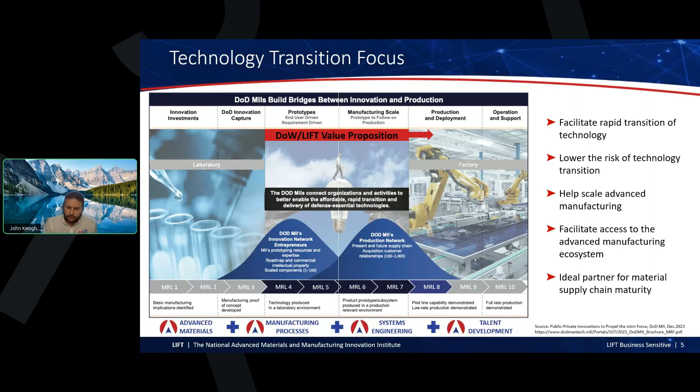Now, the reason we're here, talking and spending our time together, is, as I mentioned, a technically interesting but also serious problem, serious topic: hypersonics. So I want to frame up what it means, why do we care, why is it a problem.

But there's a pacing threat too. Adversarial nations, China, Russia - we'll talk more about that in a couple slides - have operational and/or near-operational systems. So the United States really has to hit the gas pedal, put the pedal to the metal, or balls to the walls, airplane lingo, to not only maintain deterrence, but really regain an overmatched dominance position in layered defeat options.

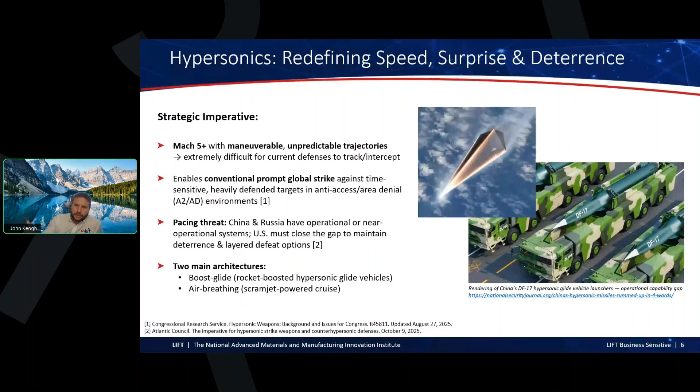But hypersonics, why is it different, right? We all know the stories about the SR-71. If it's sitting on the tarmac cold, it's leaking jet fuel. It has to get up to temp to actually cause that thermal expansion of the body and start sealing up those joints so it no longer leaks. They actually have to refuel in the air, and then they're fine to go.

So aerothermal heating, something that we're all familiar with, right? Well, aerothermal heating and just the conditions in general begin to change dramatically once you hit Mach 5 and above.

In those conditions, the air dissociates and ionizes. So it's a plasma, right? So now you have non-equilibrium chemistry. It's a very aggressive chemical environment.

That plasma sheath does a lot of interesting stuff as well. Of course, it drives oxidation and erosion. It also transfers heat to your surface when the plasma recombines to the surface. But since it's a plasma, electromagnetic radiation can't get through it effectively. So it also disrupts communications and sensors and things like that.

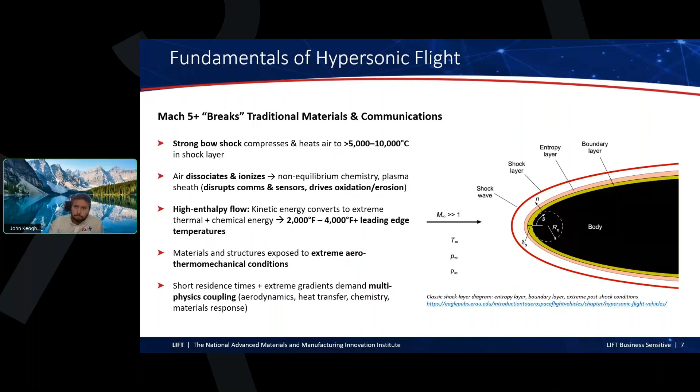So as I mentioned, it's exciting. It's fun to work on, but it's challenging, that's for sure. And that obviously then begets some serious changes as far as how we approach material selection and manufacturing, right?

So really, the hypersonics necessitates a materials revolution. We have ultra high temperature capability requirements, high specific strength and toughness, oxidation and erosion resistance, shock tolerance, thermal shock tolerance. As I mentioned, weight matters, right? Mass costs energy, and so you can't just launch a tungsten vehicle effectively. I mean, it can be done, but it costs a lot of energy. And then just as important, or maybe even more important, is manufacturability at scale.

So a lot of the material systems that are used are difficult to produce or take long times to produce. Later in this deck we'll see some interesting stuff we're doing, and I know lots of people are doing really fun stuff, but we're trying to help reduce costs and accelerate the production of a particular CMC that we'll talk about.

So there are some leading candidates, right? What we like to say UHTCs, ultra high temperature ceramics. There's also UHT CMCs, ceramic matrix composites. Of course your standard CMCs, like silicon carbide, carbon SiC. Carbon's another one with the appropriate TPS, some refractory alloys. I mentioned TPS, that's where the advanced coating comes into play to manage the oxidation and erosion resistance.

But there's a lot of maturation hurdles, right? I mentioned the predictive modeling of the material response and environment interactions, multi-scale, multi-physics, scalability, affordability, repeatability. Joining is also a big problem. That's again, interesting but difficult.

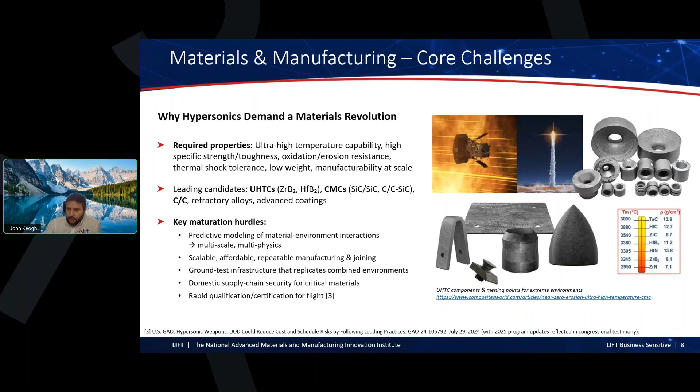So all these hurdles are real. A lot of great work has been done and is continuing to be done, but we need to hit the gas. And it's because there really is an existential threat, right? So there is an acceleration imperative for the United States to move faster.

But we have to be aware of this. They're pushing hard, they're hitting the gas. And a side vignette, just talking about shipbuilding, for instance the China State Shipbuilding Corporation, just to frame up adversarial nations - it's really not just a commercial shipbuilding industry, it's dual use, and they're putting, I think it's somewhere on the order of 1,000 times more mass into the ocean per year than we are.

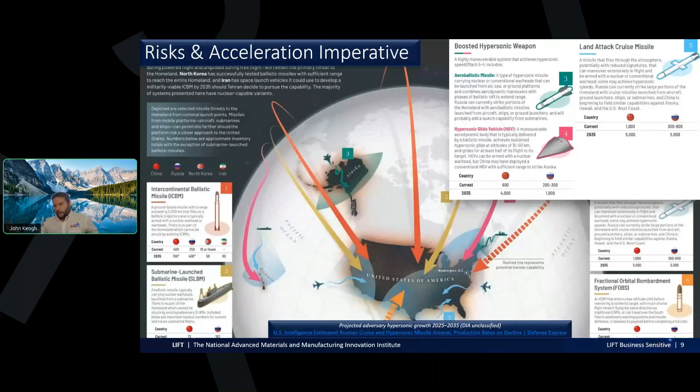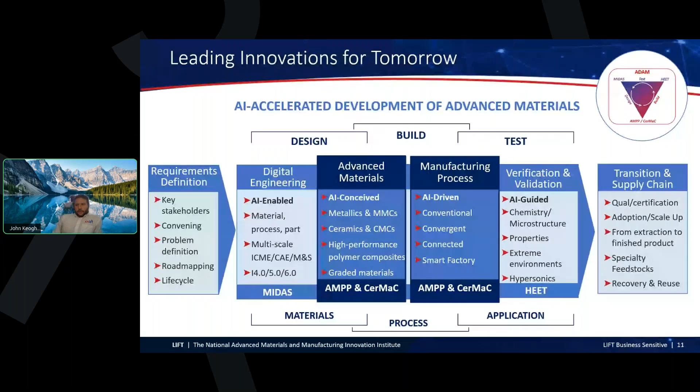So I mentioned those acronyms and differentiating capabilities. Really, that's what they are. At each one of those nodes and those verticals on the tech pillars is a packaged set of capabilities with a defined intent. I have slides in more detail on these, so I'm not going to dwell on them here.

MIDAS means the Materials Informed Digital Acceleration Suite. AMP means the Advanced Metallics Production and Processing Facility. CERMAC you can think of as the analog, the ceramics and CMC's analog of AMP. Then HEET is the Hypersonics and Extreme Environment Testing Facility. So MIDAS is design, AMP and CERMAC are build, and then HEET is test.

So MIDAS, just a couple slides. Anchor point, this is where we are, right? Digital engineering side of things, although again, it interacts and connects with the whole rest of the chain there.

Most of the time when people talk about integrated computational materials engineering... as we go through these, don't think about lift. Think about problem solving in the setting of hypersonics and extreme environments. How are we designing new materials fit for purpose, or solving problems fit for purpose, whether it's materials or manufacturing, they go hand in hand. When we see these slides, think about the intent of them: to facilitate finding solutions for those types of problems.

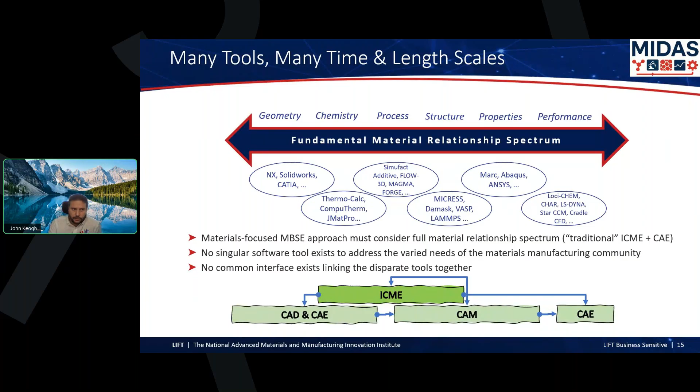So of course, if you can accelerate things like that with ICME and the whole design side of things, projections show that if we have a fully automated ICME approach across that whole spectrum, you can actually drop an alloy development schedule anywhere from 60 to 70% of the original time required, and 50 to 60% of the cost. So there's value there too, and this helps us move fast.

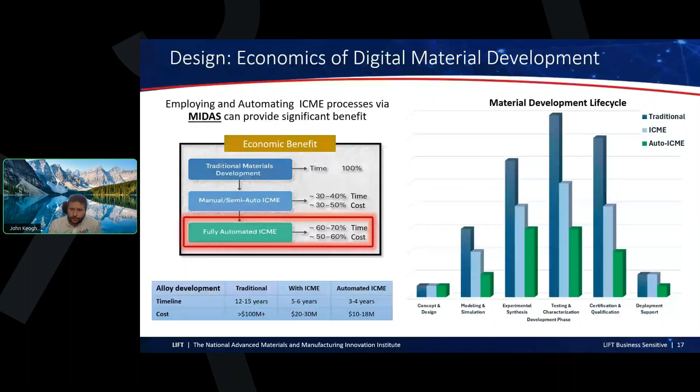Quick comment as far as connected shop floor and mission control. In that whole building, we have a bunch of equipment. They have sensors and process data and all that. We're connecting all those systems and their associated data streams into our mission control through our servers and HPCs.

We have dashboards that we display. We can look at real-time data. We can also interrogate those data streams with our ICME models as well, and really make that robust cyber physical connection. There's a lot to say there, but there's not time for it.

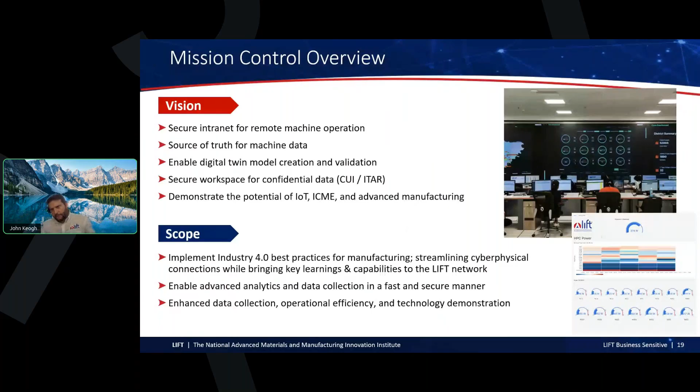So AMP, again, in the setting of problem solving for challenging environments, we're talking about build now. We talked about the design, now we're talking about build, materials and manufacturing process.

And what we found is that I can buy a crucible of novel powder or novel material from academia. I can buy a truckload from industry, but getting that development middle scale volume is very difficult in the United States. And so we recognized that, validated that reality, that challenge is real, and it's perfectly within our charter as an institute to stand something like this up.

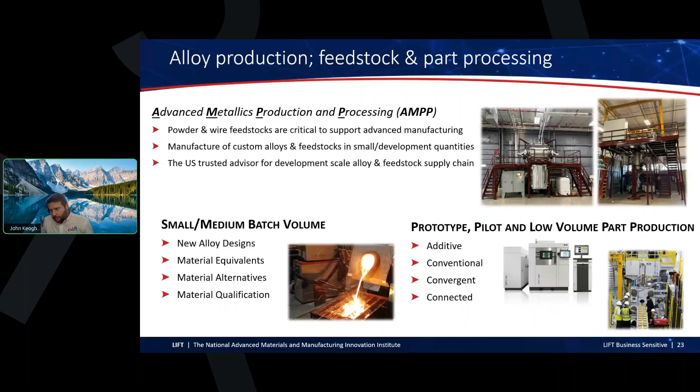So that's what we did, is actually stood up the advanced metallics production and processing facility so that we can produce development volumes of custom alloy feedstocks, say powder, wire, rod, bar stock, castings, et cetera.

And the idea is that, roughly speaking with some asterisks there, we can alloy just about any metal in the periodic table. We can make powder with just about any metal, any non-pyrophoric wire, and so forth. So it's to help fill that gap again, that 4 through 7 space. That's our charter, that's where we belong, and we're manifesting that in the physical build side of things.

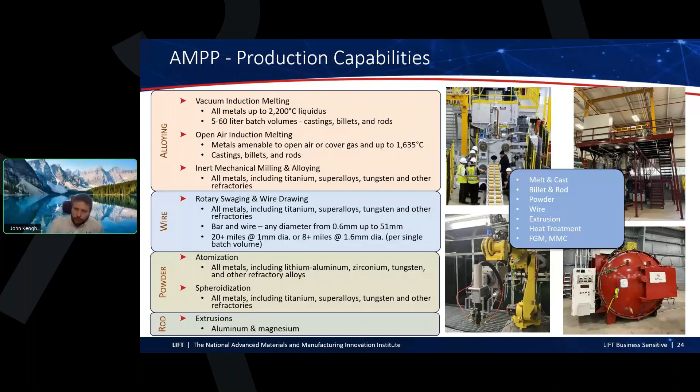So also have a lot of actual part production capabilities here. Powder bed fusion additive systems, a 1 kilowatt M290 as well, just to call that one out. I would say a world-class multi-wire plasma arc welding DED cell for large format builds, a whole bunch of other stuff, extrusion presses, friction welding, other presses. It's a big kid's playground for sure.

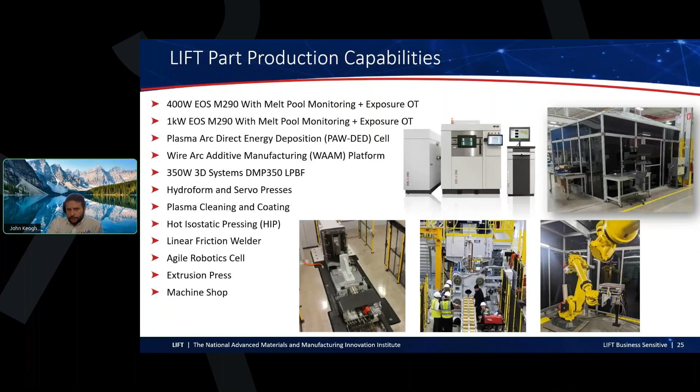So if you haven't been to Lift yet, please visit us, come see what we have and how we can help you. And then just a couple distinct call outs here: a 250-ton DCS press for direct current sintering, and then the plasma arc welding DED cell.

So we can do high build rate type stuff, 40 to 60 pounds an hour. We can run anywhere from 2, 4, or 8 wires into the melt pool simultaneously. So we can either do online alloying or spatially or functionally graded materials.

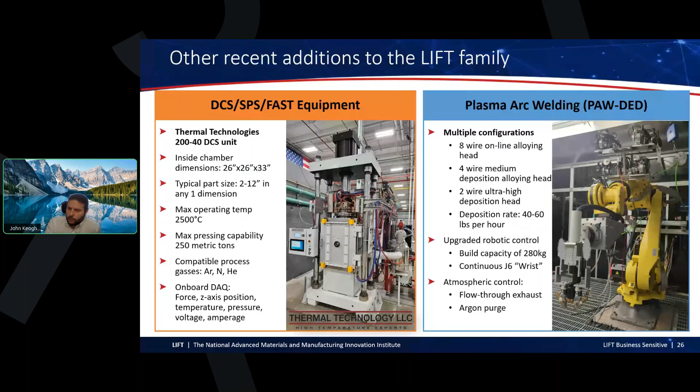So again, the functionally graded type capability actually maps into things like leading edges or kind of graded structures that are more appropriate for challenging environments. And then, as I mentioned earlier, comprehensive laboratory services, all the standard things that you would expect. Ceramics and CMCs.

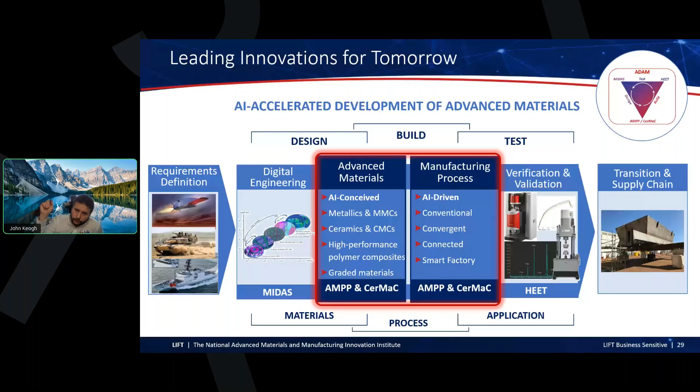So again, this is a build side of things. CerMaC is the high temp materials analog of AMPP, and our inaugural project that kind of nucleates CERMAC, we're looking at some process and material selection modifications to lower the cost and accelerate the rate for production of graphitic carbon-carbon. Looking at low viscosity resins that are graphitizable, they're actually thermosets, so we have rigid green parts we can take out, go straight to pyrolysis, and so on.

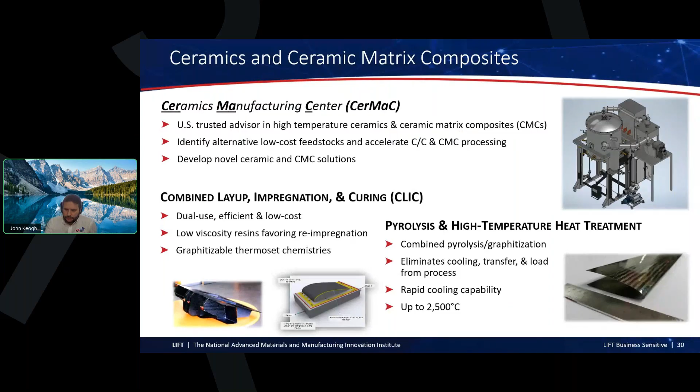And we have some process mods that we're looking at on the heat treat side of things as well to accelerate. So early stages of that project, keep your ear to the ground as we move that forward, but very excited about that. And then HEET, the testing side of things, V&V.

So currently we're standing this up at LIFT in Corktown. Eventually this set of capabilities will end up going to Selfridge Air National Guard Base in Michigan. Broadly speaking, we're talking about high enthalpy sustained hypersonic testing up to Mach 8, so Mach 4 through Mach 8, matching minimum runtime and enthalpies to the actual Mach number. We can simulate different altitudes.

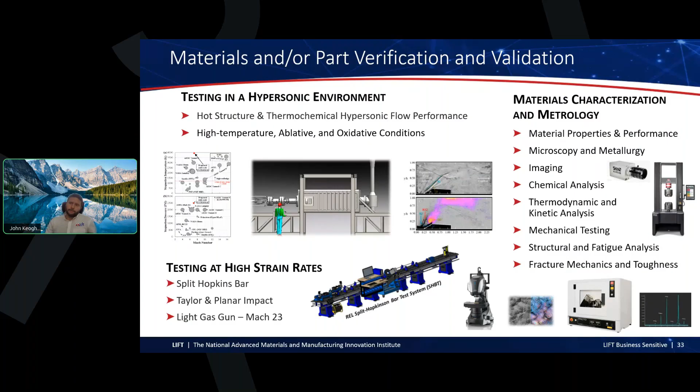So, high enthalpy sustained, high pressure, high temperature, up to Mach 8 testing with a wealth of in situ data that we can collect as far as thermographic, chemistry, pressures, you name it. And then the other side of things is more relevant to munitions and armor, basically high strain rate type testing up to 10 to the 8th in modified environments. So that's the HEET side of things, and I've got 15 minutes left, so I think this actually worked out really well here. So why do we care about all that?

Let's launch a poll right now as you transition, as you kind of just talked about that HEET. I'm going to launch this poll so we can understand what the audience is experiencing. It's launched. I want to make sure the audience sees it. When it comes to Hypersonic Systems, which best describes your organization's current role? It looks like I got some 25% participation for all those that are listening. If you could give it a minute. And then I do have another one as you transition to some of the other presentation, but we'll let this interrupt me whenever you want. No worries, just tell me when to stop.

So we've framed up LIFT, why we exist, framed up the problem as far as hypersonics, why we care, what are the unique challenges, our approach to problem solving, the associated set of capabilities in the setting of a National Manufacturing Innovation Institute that we've built and stood up to address these types of issues.

And so what? Well, I'm just going to give you a quick example here, how we've exercised that full workflow. We're not going to cover all of it, but that full workflow where we've run the digital thread across the whole spectrum, all the way from short length and time scales at the materials level, all the way through the performance level, and ran that hand in hand with the physical activities, making materials, making parts with materials, testing materials, and validating and calibrating those models all the way through to bring us to success for specific need.

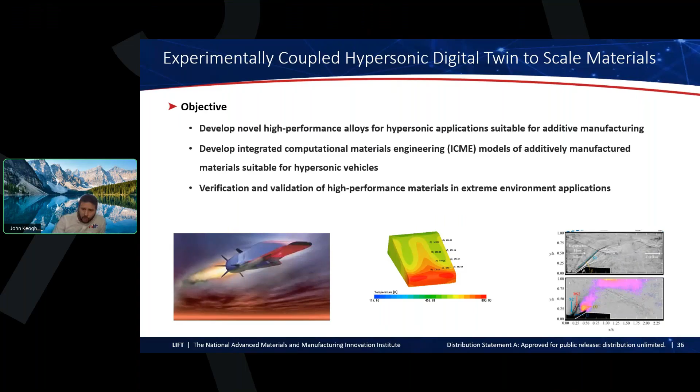There's actually multiple success stories in this, but either way, what we're going to do is focus on a couple elements of the scope of this project: the microstructure simulation, 3D printing—in this case powder bed—and also the hypersonic performance simulation. We'll eliminate the geometry, structure, properties, etc., but of course all of that was a part of it.

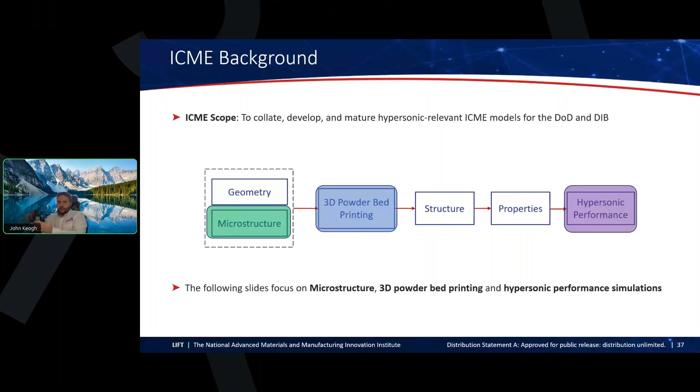So thinking about the microstructure, I mentioned chemistry, process, structure, properties, performance. Your chemistry moves through your manufacturing process, and that's going to impart those together, yielding a location-specific thermomechanical history. Things like solidification rates, along with the chemistry, will yield your microstructure, which then drives properties and all the other fun stuff.

So how do you predict your microstructure? Well, one of the ways we approach that is through phase field modeling. There's all kinds of interesting things about it—good things, challenging things, etc.—but this is what we leveraged and used: phase field modeling.

We then took that thermal history and coupled it with our phase diagram CALPHAD models and the phase field code, and we were able to simulate our microstructure evolution through the powder bed, heat treatment, and all that—identifying the presence or lack of deleterious phases, observing and predicting grain growth, and so on. We actually got very good agreement, pretty much across the board, so we were quite pleased with that.

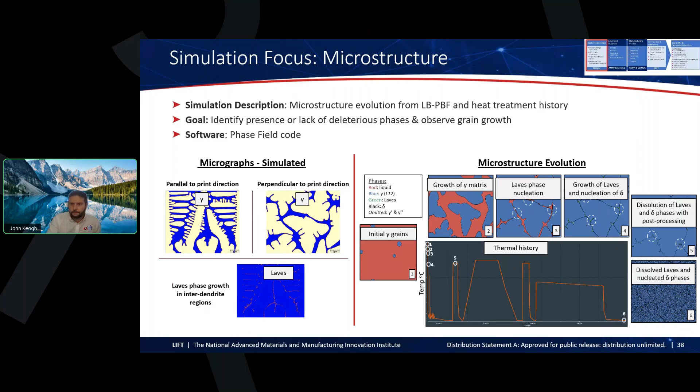Looking at the macro scale level simulations, what we're really talking about is the powder bed fusion and also the test. On the left, we're simulating the powder bed fusion and heat treatment—effectively a thermal FEA type simulation coupled in with our phase field and CALPHAD codes. The goal there was really to extract location-specific thermal histories and residual stresses.

One thing I didn't mention earlier about Midas is that it doesn't just pass models back and forth—there's a web and thread of connectivity across all those models tied to the geometry. So we can define a matrix of locations on a part and track them from code to code to code. We have this point tracking capability that we can carry all the way through, so we can actually audit on a location-specific basis, and again, we did that.

We can predict residual stress and temperature and align that against our physical results. Then in the hypersonic test, we're talking about a Mach 5 reacting flow test, similar to what we're setting up at Lift. We used two different codes to predict the aerothermal environment around these wall-mounted samples, and you can see the results are quite different—the one on the left has very high temperatures on the scale, while the one on the right is a little more realistic.

The one on the left is actually a hypersonic code—we're redacting it because we've actually worked with them to solve some of the issues there. But not all codes are created equal. All models are wrong, some are useful, so you have to be careful about that.

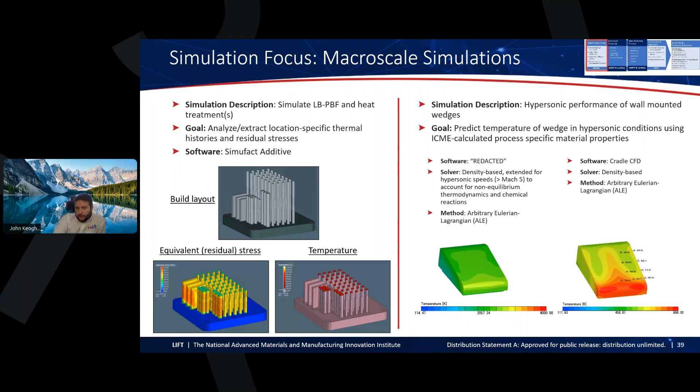So then COTS and novel alloy powder, as I mentioned, we worked with a couple different alloy systems. We benchmarked against the COTS, and also modified the chemistries to be more printable and mitigate some of the needs for heat treatment. We did that in Midas. At the time, AMPP was not commissioned, so we actually had that toll processed, and that was quite a challenge. And then, of course, you validate the chemistry against the spec and measure all the particle sizes, et cetera.

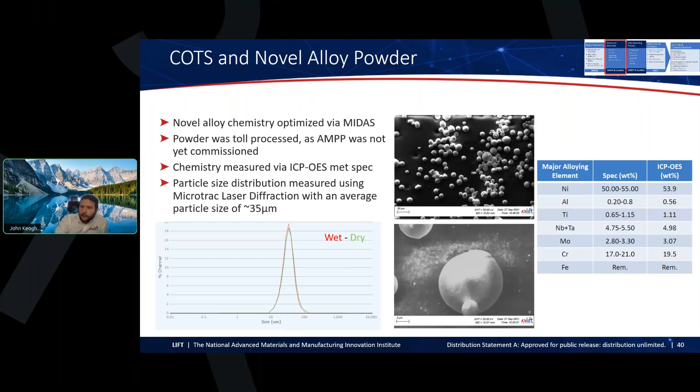So then we had powders. We made parts, as you saw on the prior slide, and what you see here on the next slide. We ran it through the manufacturing process. In this case, we actually just used your standard ubiquitous 400-watt M290 and made a range of fracture toughness or Charpy samples, tensile bars, fatigue as well. We looked at uniaxial, rotary bend, and we did a bunch of fatigue testing as well.

Now it's going to be in a different environment, and there's going to be different heating curves and so on. So we ran that all the way through, followed all the ASTM methods. Stress relief, wire EDM to remove specimens. We also HIP, solution annealed and aged, and then brought this into the physical test.

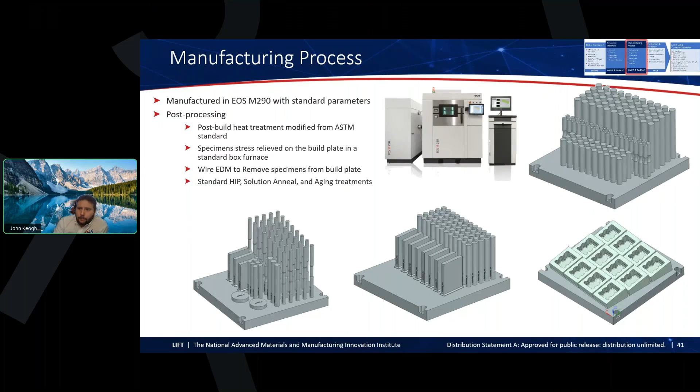And then we carried these results from CFD1 back to the software vendor and actually brought them value and identified some challenges and issues. I think that we've been able to course correct with them since then. So part of the way that we work with our partners and help to bring value. But again, this all relates to the handshake between the digital and physical and building that digital thread all the way through.

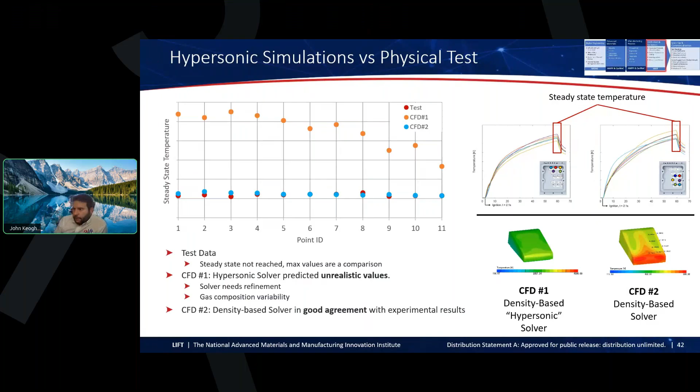Yeah, I think there's an error there. Actually, that doesn't make any sense. I believe we did actually see some coarsening, and that would be based on heating. But all that data feeds in.

We are working on integrating chemistry and ablation codes into Midas as well. We're not quite there yet. We know what we want to integrate. We actually have the codes, we just have to get the hooks for the software into Midas. So we're building Midas every day. We're building our physical capabilities every day. Again, the intent is actually to solve hard problems in material solutions and manufacturing for hypersonic.

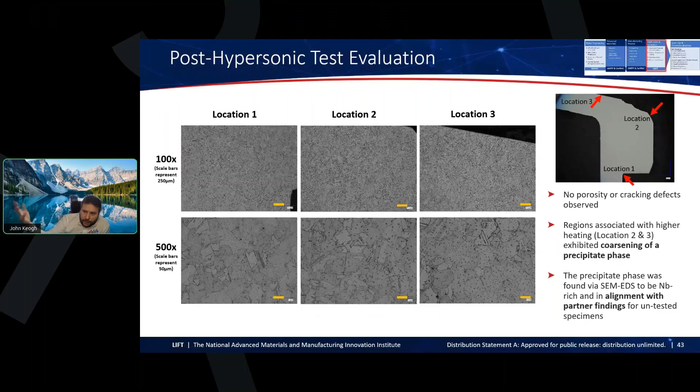So, kind of a transition story here, a scale-up story. The test section for the samples that we were making is roughly a 2-inch by 2-inch exposed area. That means the samples are limited in size as well. It's a little bit difficult to instrument them, and of course there's optical imaging and inspection that you can do as well.

But we're building with Kareem on that at UCF a larger version of this test chamber at LIFT, as I mentioned earlier. I already gave you the figures in there, Mach 4 through 8, up to roughly 3,500 Kelvin stagnation, 170 atmospheres stagnation pressure, and it's effectively a continuous runtime compared to, say, shock tunnels and things like that, where you get 10 to maybe 20 milliseconds of data. That will be online mid-2027.

It's meant to be an extended workbench for anybody on this call or otherwise, and that's why it exists, to help accelerate material solutions and make things move faster, better, cheaper.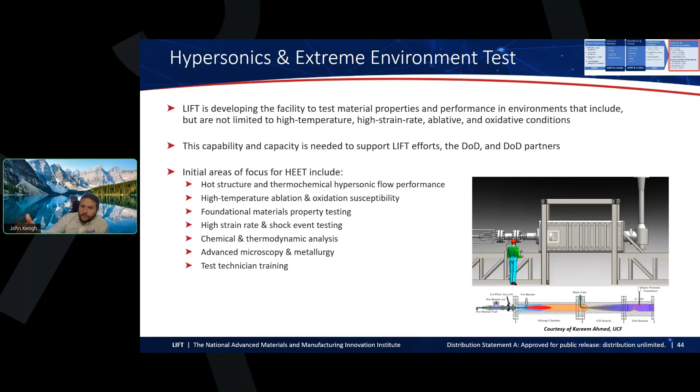So this is how it all integrates: digital, advanced materials, manufacture, process, V&V, scale up and commercialization. All of that is facilitated by these carefully chosen and developed differentiating capabilities that complete that design, build, test, development phase, if you will. So MIDAS, CerMaC, and HEET. In doing so, we like to call that ADAM, because it allows us to accelerate the development of advanced materials.

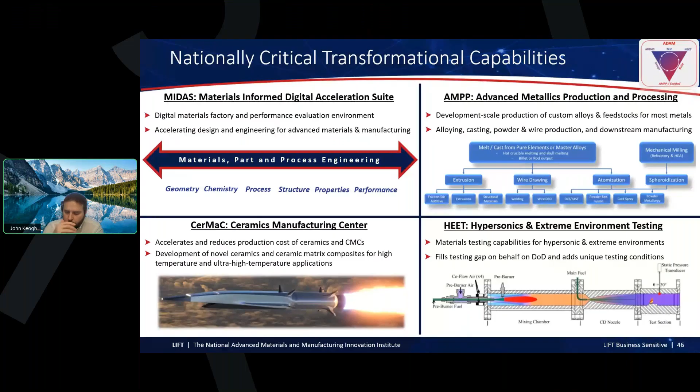So it's a vertically integrated stack of capabilities. All the team members are vertically integrated as well. It's all co-located, and that's really what ADAM is. It's really an ecosystem, or a network, I should say. It's scalable, it's replicable. We have a range of important stakeholders, key stakeholders, authoritative bodies, suppliers, government partners, and so on, TRMC, et cetera, all working together. And it's in service of solving problems like hypersonic materials.

So that again is the whole setting of this talk: what are the challenges that hypersonic environments present? How do we respond to them? How do we relate that back to adversarial risk and national security? And what at LIFT are we doing to help move that needle? That's how it all comes together.

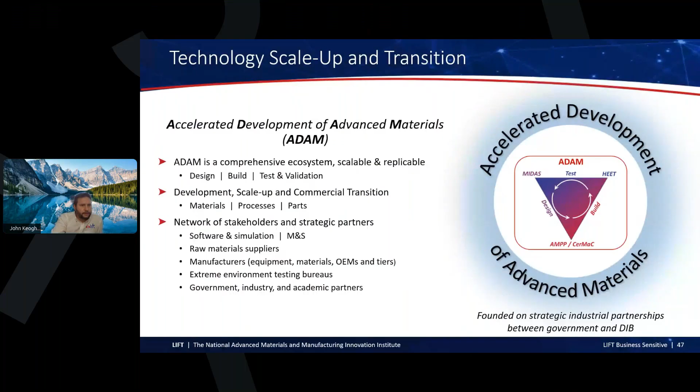Let's launch another poll right now. What I want to talk about is I'd like to understand what the audience feels is the most critical need to de-risk these materials and manufacturing programs. So I'm going to launch the poll. For those of you that are on, as John shared what we're doing, I'd like to understand what is critically needed on your end.

For those of you that operate in this type of space, whether it's hypersonics or other extreme environments, what are your biggest challenges? Is it qualification? Is it materials and manufacturing? Is it collecting process data to facilitate either optimization or drive decision changes? What's important to you?